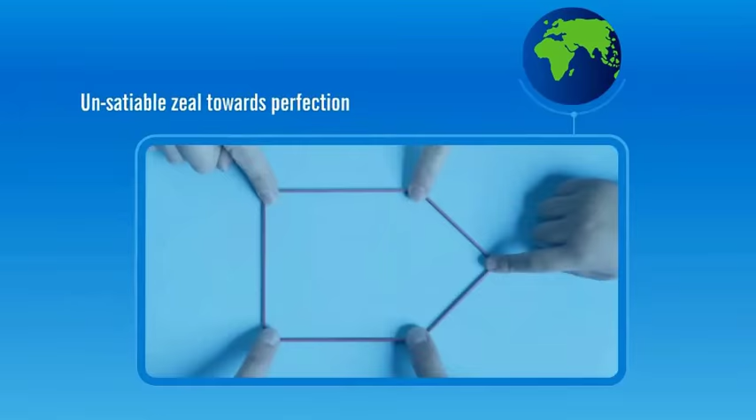An ongoing quest for advancement in technology. A never-ending saga of quality pursuit. An insatiable zeal towards perfection and a penchant for meeting commitments and client satisfaction. These principles hold the key to success of AFCONS and have catapulted us to new glitzy heights.

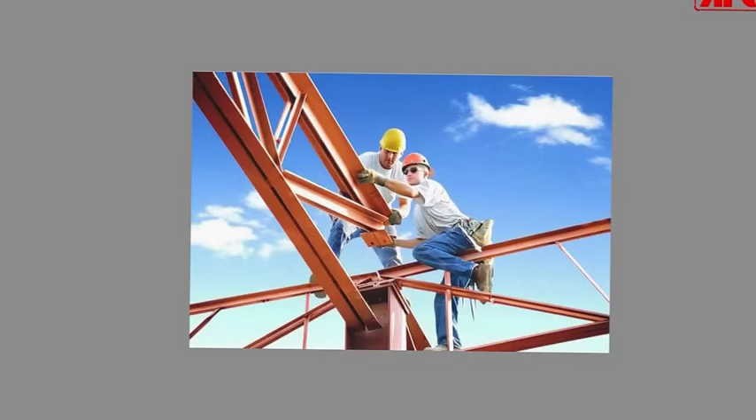Established in the year 1959, AFCONS today is one of India's premier construction companies, involved in the infrastructure development segment with an enviable record of executing varied types of construction projects in the fields of bridges, roads, marine works, pipelines, tunnels, LNG tanks, nuclear power projects, specialized foundations and superstructures.

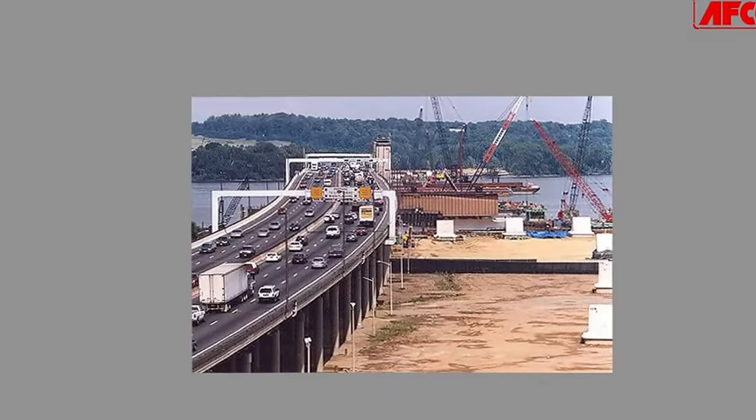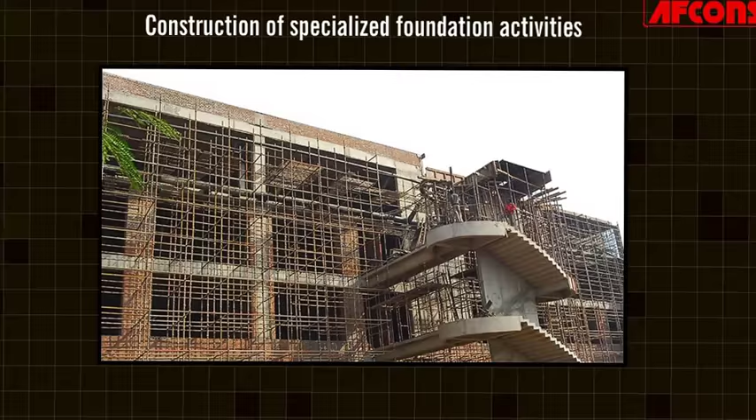In every phenomenon, the beginning is always the most important event. The success saga of AFCONS also goes back to the year 1959, when it was established as a partnership firm between Rodio Foundation Engineering Limited, Switzerland and Hazarat & Company, India. The company started its operations with construction of specialized foundation activities. Year 1963 saw the first major diversification landmark of the company as it entered the field of marine constructions.

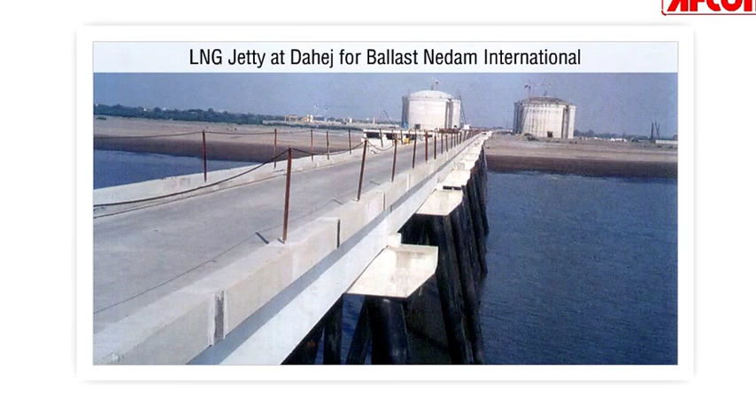The company completed 140 marine structures in the years to follow, including building dock complex at Vizag for Hindustan Shipyards, coal handling berth at Ennore for Chennai Port Trust, crude unloading jetty and associated facilities at Nagapattinam in Tamil Nadu for Chennai Petroleum Corporation, LNG jetty at Dahej for Ballast Nedam International, and marine oil terminal berth J1 and J2 at Mumbai for Mumbai Port Trust.

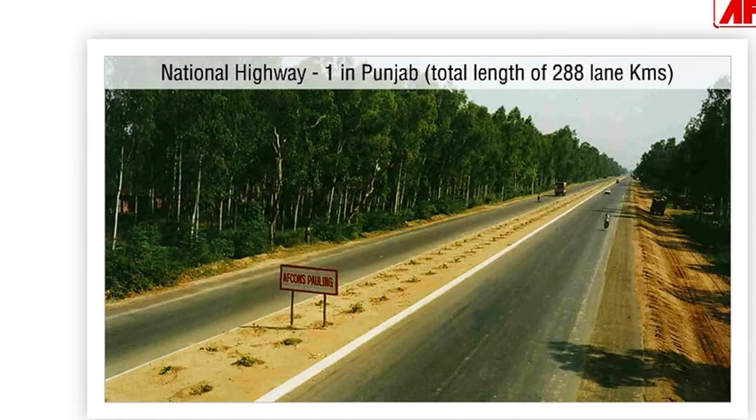In 1976, the company was registered as Asia Foundations and Constructions Limited, AFCONS. AFCONS entered road construction in the year 1986 and executed more than 600 kilometers of roadworks and expressway projects in India. National Highway 1 in Punjab, total length 288 lane kilometers. National Highway 45 in Tamil Nadu, total length of 160 lane kilometers.

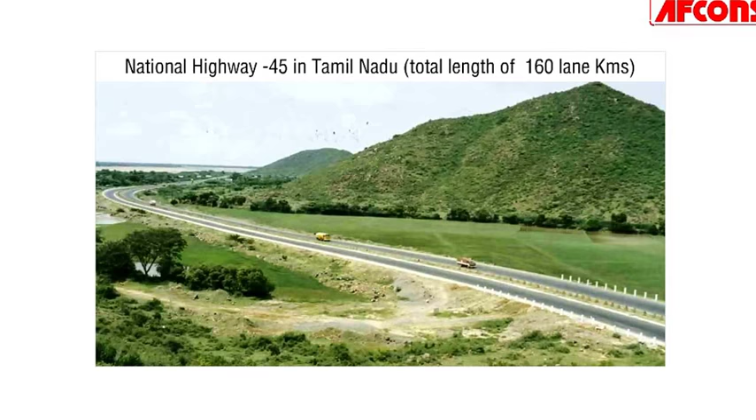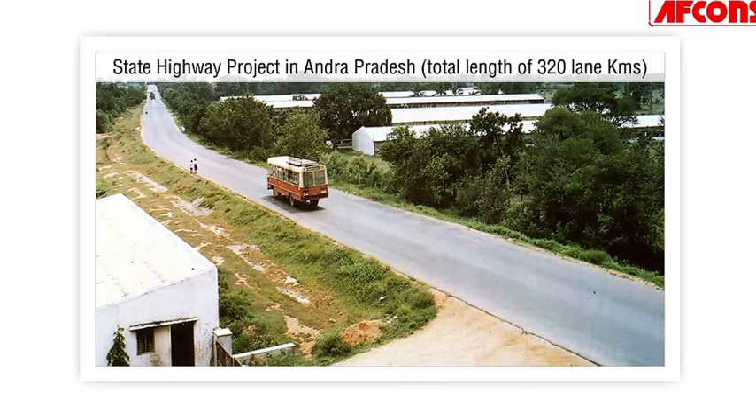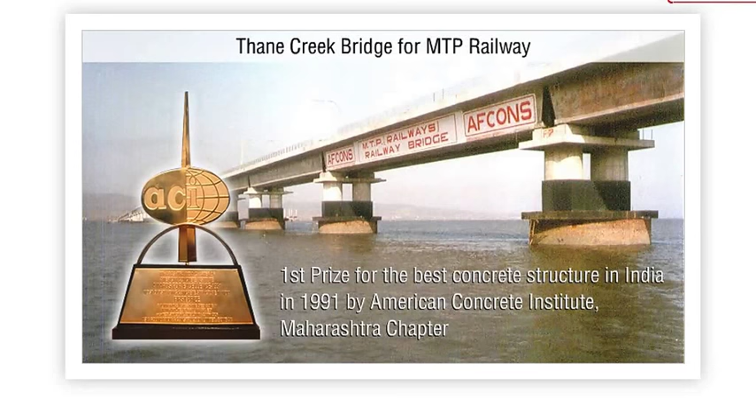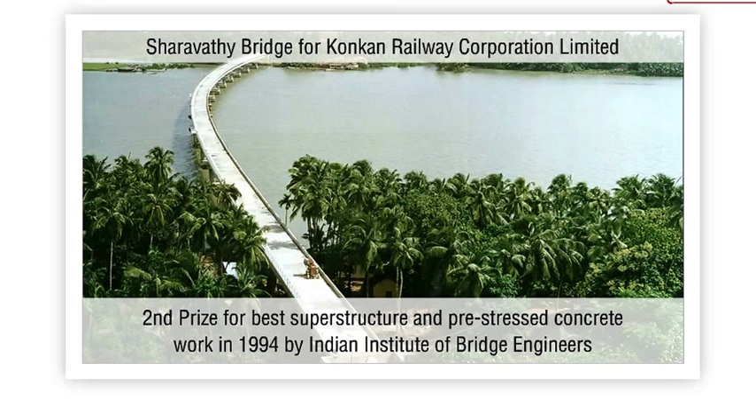Some of AFCONS' major strengths have been construction of road and railway bridges, flyovers, viaducts on pile foundations, well foundations and open foundations, and bridge superstructures comprising of pre-stressed concrete box girders. Some of the bridges and flyovers constructed by AFCONS have been awarded the most outstanding bridge structures, which include Thane Creek Bridge for MTP Railway, first prize for the best concrete structure in India in 1991 by American Concrete Institute, Maharashtra chapter. Sharavathy Bridge for Konkan Railway Corporation Limited, second prize for the best superstructure and pre-stressed concrete work in 1994 by Indian Institute of Bridge Engineers.

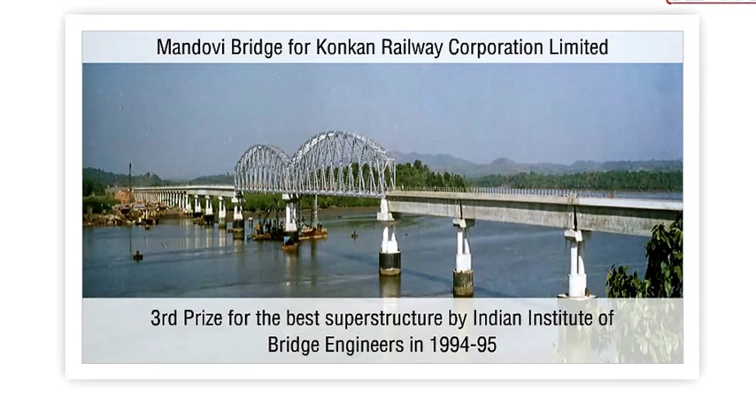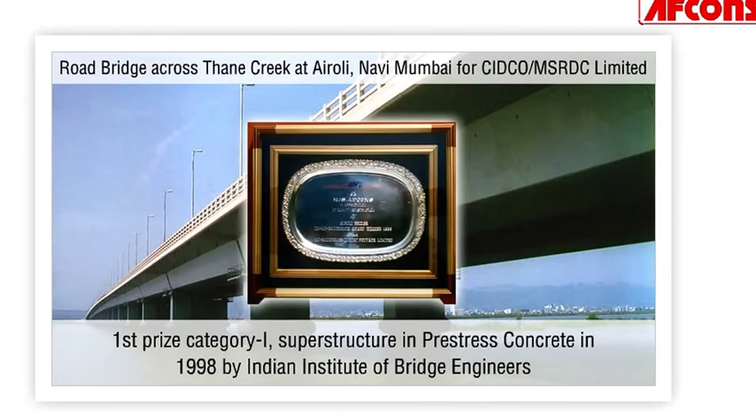Mandovi Bridge for Konkan Railway Corporation Limited, third prize for the best superstructure by Indian Institute of Bridge Engineers in 1994-95. Road bridge across Thane Creek at Airoli, Navi Mumbai for CIDCO MSRDC Limited, first prize Category 1, superstructure in pre-stressed concrete in 1998 by Indian Institute of Bridge Engineers. The year 1996 saw the company change its identity to AFCONS Infrastructure Limited due to its field of operations being closely related to infrastructure development.

From the year 2000, AFCONS is part of the $500 million Shapoorji Pallonji Group and is one of the market leaders in the construction industry. Besides doing major projects in India, AFCONS is also involved in various marine works in Sri Lanka, Mauritius and Yemen, railway bridges and marine facilities in Iraq, marine work in Assab and Ethiopia, and desalination plants in Oman. With a visionary management supported with able manpower and state-of-the-art equipment resources, the turnover of the company has seen a growth of over 100% over the last 5 years, from a mere 310 crores in the year 2000 to 700 crore rupees in 2005-2006.

AFCONS today employs more than 5,000 dedicated personnel, which include 1,000 engineering and management personnel, 1,500 technical and skilled operators, and over 2,000 people as project staff across its project locations. The success of AFCONS is evident by its most reputed clientele. The never-ending and growing list of the most reputed names in different industries relying on AFCONS reflects the fact that AFCONS have not just ruled the market, but have also won hearts and trust of our customers spread across the globe. To honor our time frames, delivery schedules, and quality parameters, we work with the best technology, systems, processes, and equipment that help us cut down on delivery cycle.

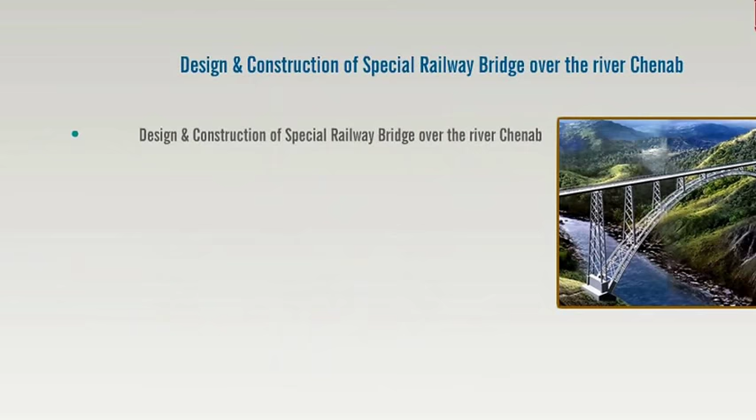In the year 2004, Afcons was awarded the contract for design and construction of special railway bridge over the river Chenab. Chenab Bridge is a steel arch bridge that spans the valley of the river Chenab near Jammu in northern India. As a part of Udhampur-Srinagar-Baramulla Rail Link project, this bridge will connect the Katra and Laole section of Jammu and Kashmir state. This major EPC contract, valued at 512 crore rupees, happens to be the single largest bridge contract awarded by the Indian Railways till date.

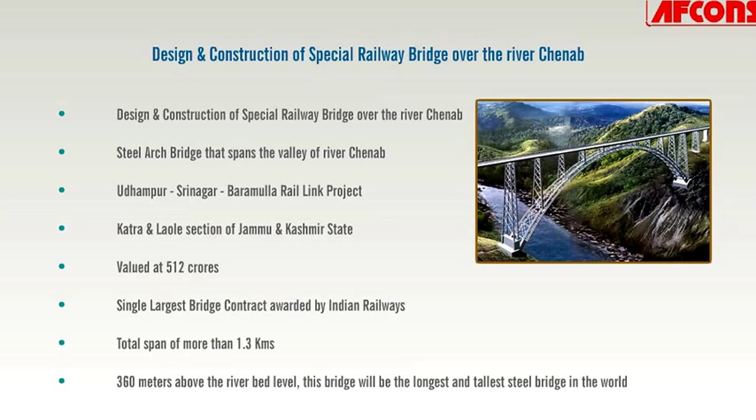With a total length of more than 1.3 kilometers, supported at 360 meters above the riverbed level, this bridge will be the highest steel bridge in the world. The contractor for this project is CBPU, that is Chenab Bridge Project Undertaking, which is an Afcons Ultra joint venture. Konkan Railway Corporation Limited, or KRCL, is the client for this project, whereas owner of the project is Indian Railways.

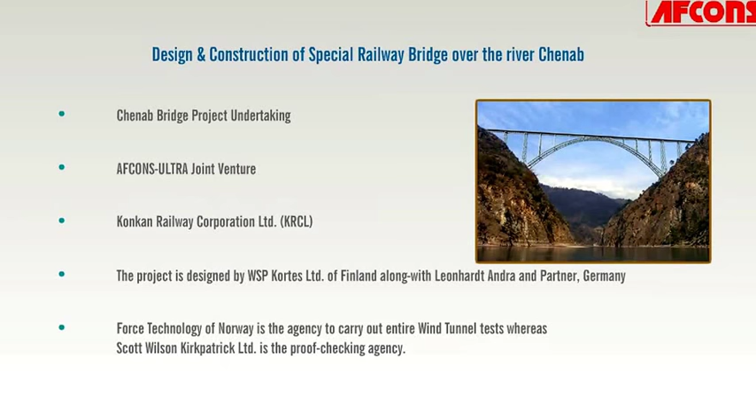The project is designed by WSP Kortes Limited of Finland, along with LAP Germany. Force Technology is the agency to carry out the entire wind tunnel tests in Denmark, whereas Scott Wilson Kirkpatrick Limited UK is the proof checking agency.

The Chenab Bridge alignment passes through a very rugged terrain of the Himalayan range and crosses the deep gorge of the river Chenab. The remote area location for the project without any road and communication facilities posed a real challenge for the construction process to start. The motorable road existed up to village Kanthan, which is 105 kilometers from Jammu, and one had to travel about 15 kilometers on foot from Kanthan to reach the bridge location. The two important villages on left and right abutment of the bridge are Bakkal and Kauri respectively, and are accessible by foot only. Therefore, constructing the railway bridge at this difficult terrain involved a significant engineering challenge.

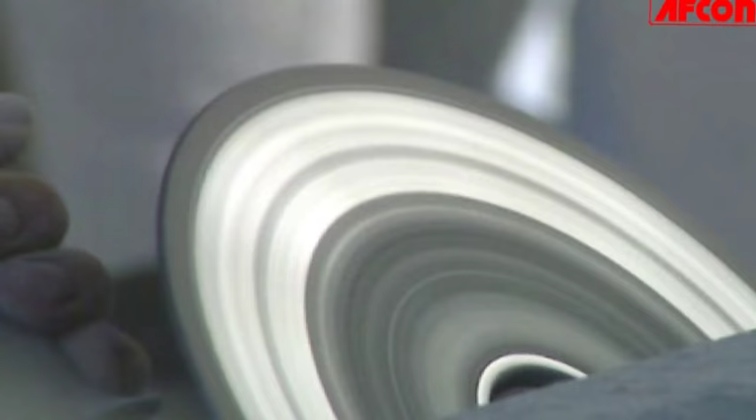To mobilize the construction equipment at the project site, an access road of about 14 kilometers was constructed up to Kauri from Kanthan, whereas access road to Bakkal village was made from Salal, which involved construction of a tunnel about 0.1 kilometers along with a road of about 10 kilometers. Due to topography of the area at the project location, grading of area had to be done to establish construction facilities. All temporary facilities are located at either end of the bridge.

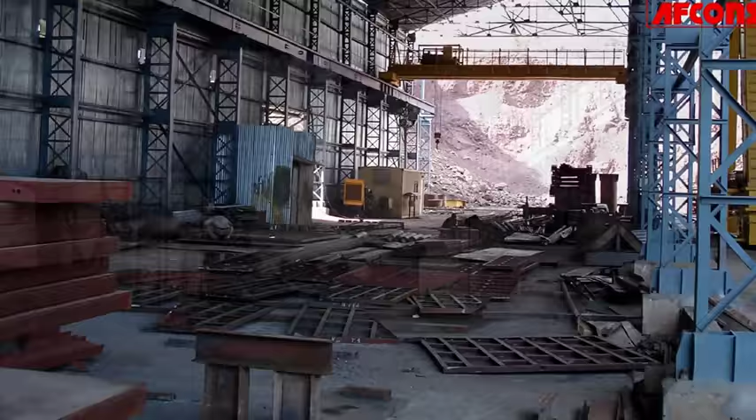About 50,000 square meters of land on Bakkal and Kauri end was acquired for establishing the site facilities such as fabrication yards, site office, colonies for staff and workmen, batching plants, material stacking, stores, etc. A private telephone exchange with satellite communication facilities is also installed at the bridge site.

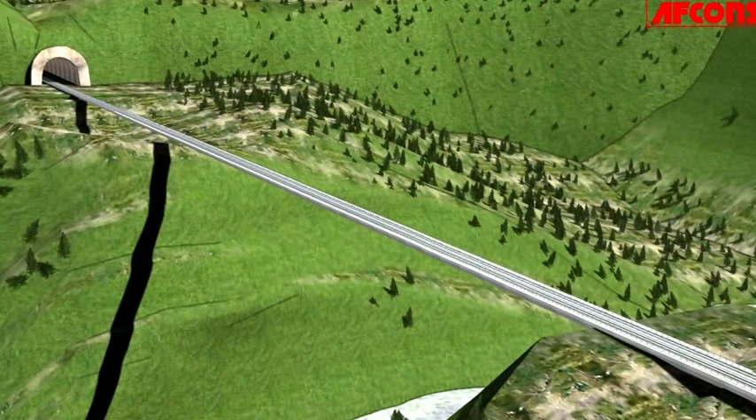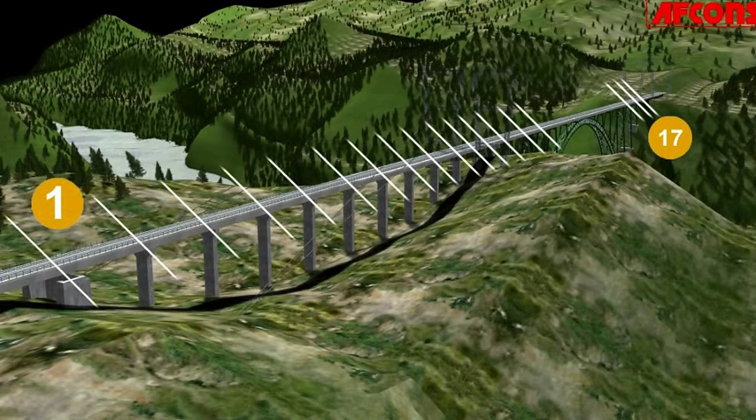The bridge would have the total length of 1.315 kilometers from abutment P10 at Bakkal end to P180 at Kauri end, having a total of 17 spans. The deck width would be 13.5 meters at the Kauri end and 17 meters at the arch portion till the Bakkal end. The construction of bridge mainly consists of three parts, consisting of approach span of 185 meters from location P10 to P40 from the Bakkal end, approach span of 650 meters from location P180 to P50 from the Kauri end, and the main steel arch span between location P40 and P50.

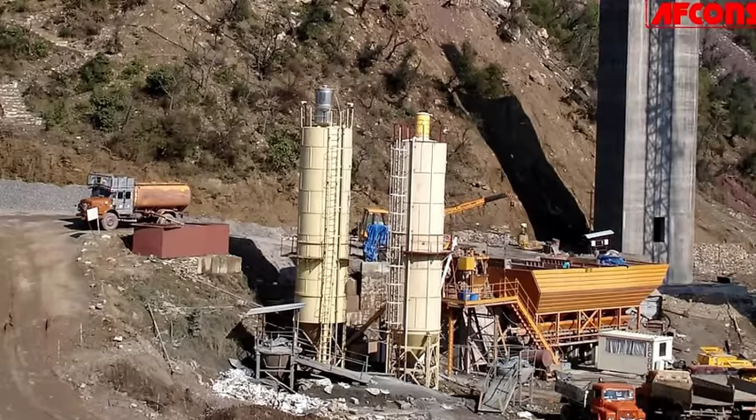The bridge would have a total of 18 foundations with 2 for arch, 2 for abutments, and 14 for the piers. A total of 46,000 cubic meters concrete quantity would be used, along with 3,600 metric tons of reinforcement steel and 25,000 metric tons of structural steel. Excavation of 11,80,000 cubic meters with 57,000 running meters of rock anchoring, drilling would be required to accomplish this specialized task.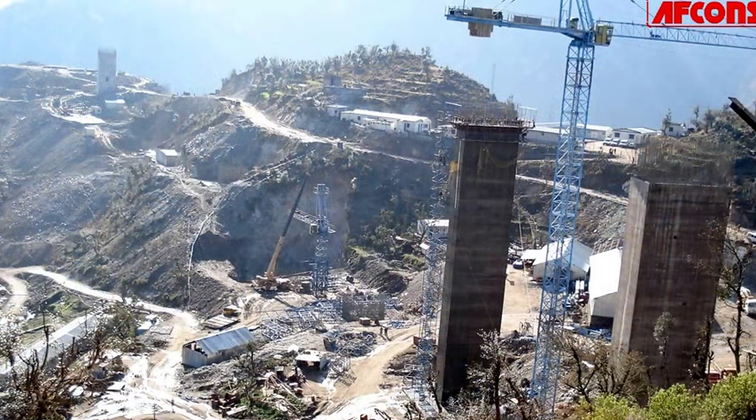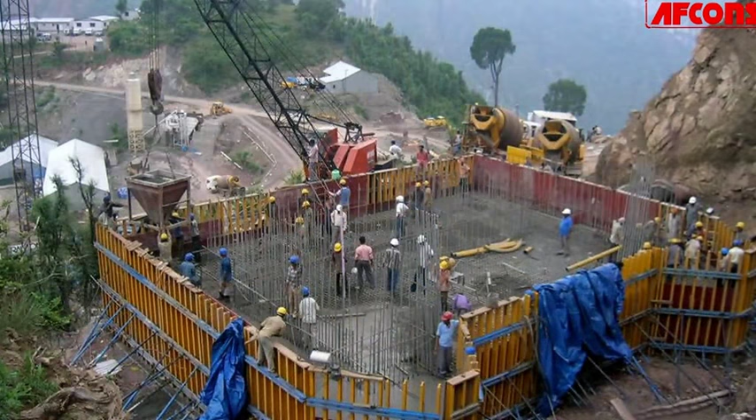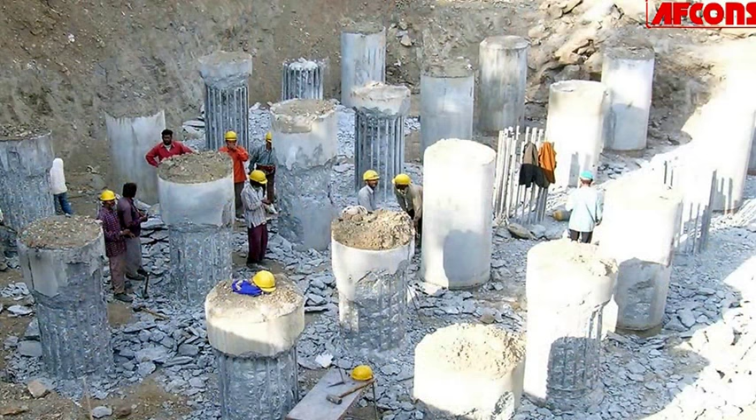The entire bridge segment is positioned from location P10 at Bakkal end to location P180 at the Kauri end. For the purpose of construction of the bridge, both open and pile foundations are being done. Piling work is carried out by conventional methods using tripod along with chisels and balers. Bored cast in situ piles of 1 meter diameter are being constructed at locations P150 to location P180. The total number of piles is 109 and the maximum depth of the pile is 35 meters at position P180.

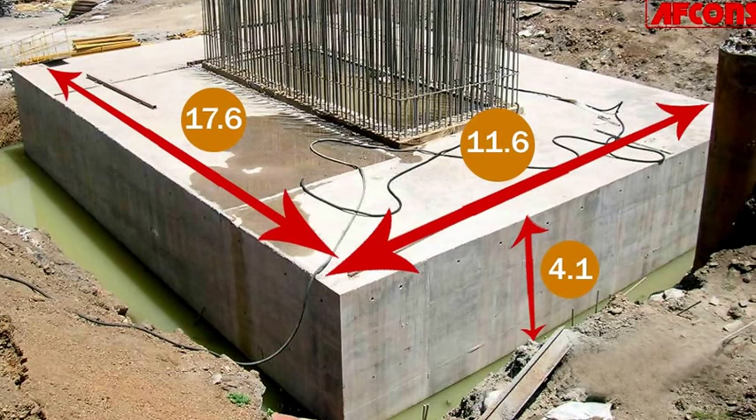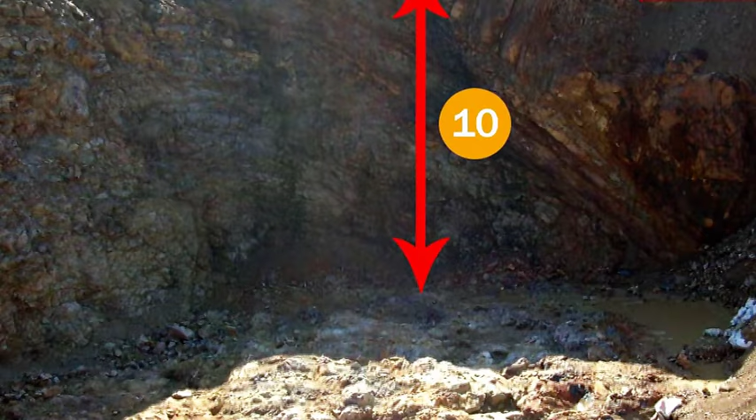Pile caps with a maximum size of 17.6 meters by 11.6 meters and a maximum depth of 4.1 meters are resting on the piles. 12 numbers open foundations for the piers and abutments are laid at 10 meters below original ground level with a depth of 3 meters at location P10 to P30 and locations P60 to P140. Maximum size of foundation would be 17.5 meters by 11.5 meters at location P80. The entire excavation is done using excavators and hard rock blasting.

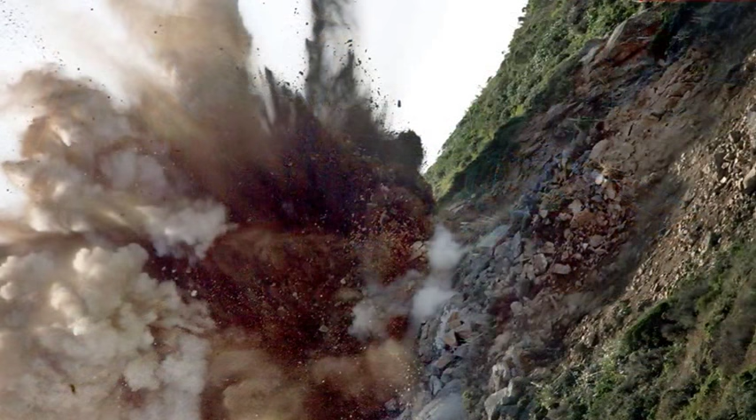Open foundations for the arch segments would be constructed at locations P40 and P50, with a size of 38 by 28 meters, having a height of 22 meters. L&T Doka shuttering is being used at both these locations.

A total of 2 concrete abutments, 5 steel piers and 11 concrete piers are constructed to carry the bridge, besides 9 trestles to support the main arch segment.

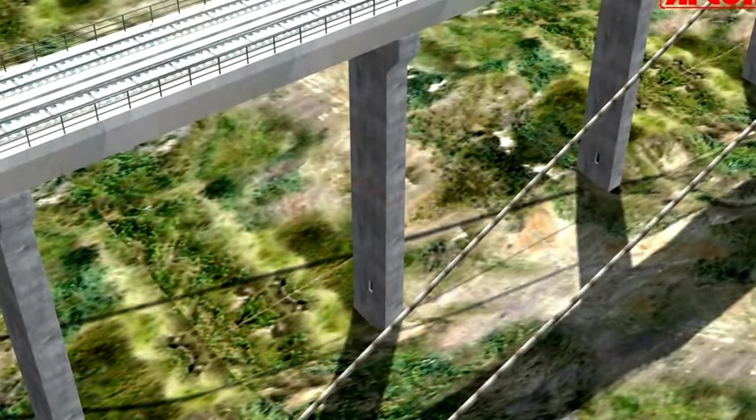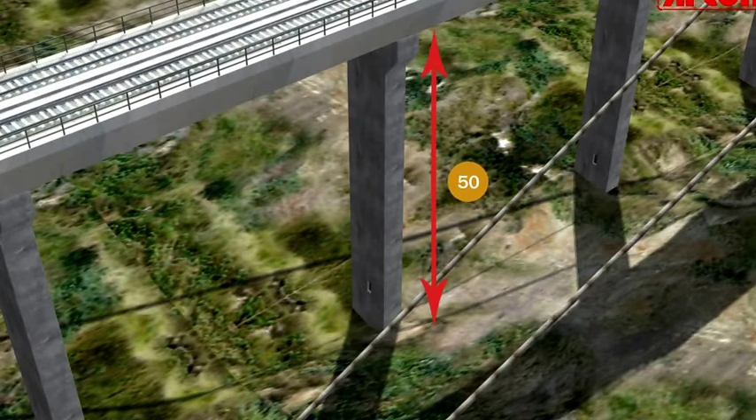The maximum height of the concrete pier would be 50 meters at location P140. Slip-form type shuttering is used to build up all the concrete piers from the Kauri end of the bridge.

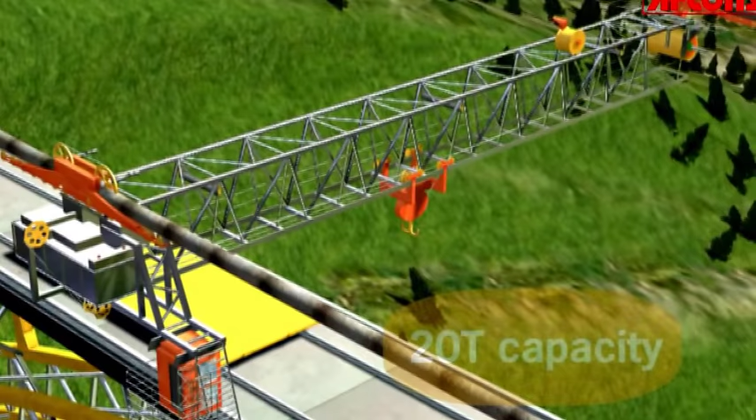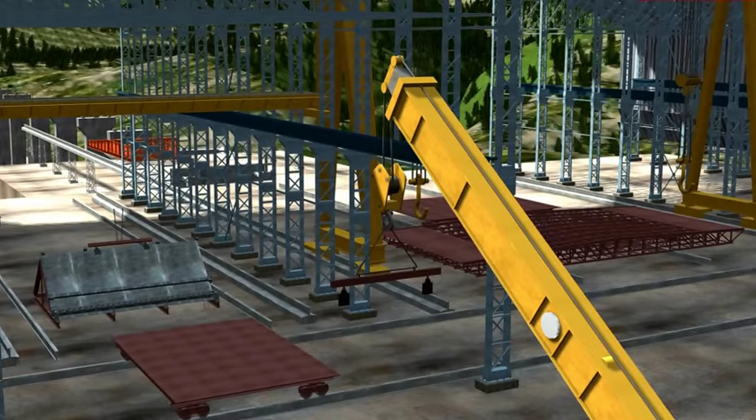2 cable cranes of capacity 20 tons each will be used to transport the steel pier components to their respective locations. Fabrication of 3 steel piers is done at Bakkal end, whereas the balance is done at Kauri end yards. There are 4 fabrication yards at the construction site, with 2 yards at each respective end of the bridge.

Yard 1 is just behind location P180 on the Kauri end and is meant for fabrication of deck segments P180 to P45. The sub-assembly shop is used for plate cutting and edge preparation, welding and non-destructive testing, from where it is transferred to the main assembly shop where segments are assembled and welded.

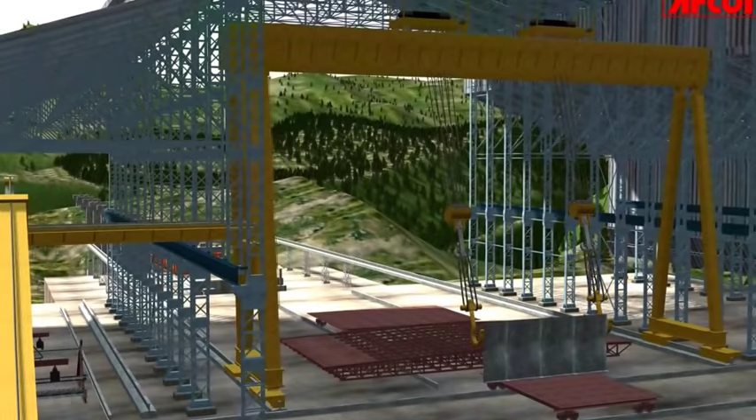The launching yard takes care of connecting the deck elements by welding, quality control and final launch of the segment after painting and metallizing. Quantity of steel work to be done in this yard is about 7,570 metric tons.

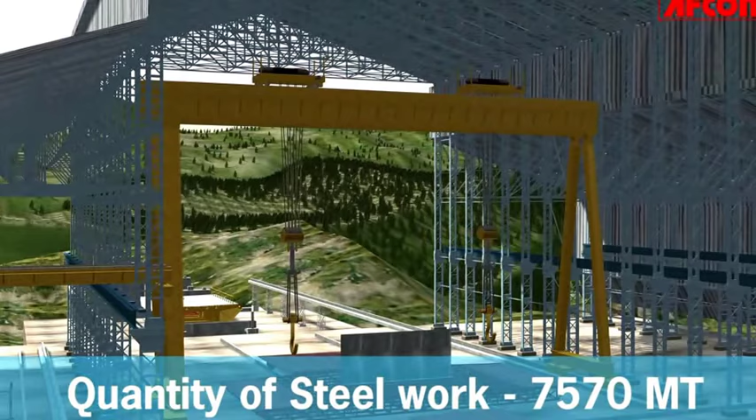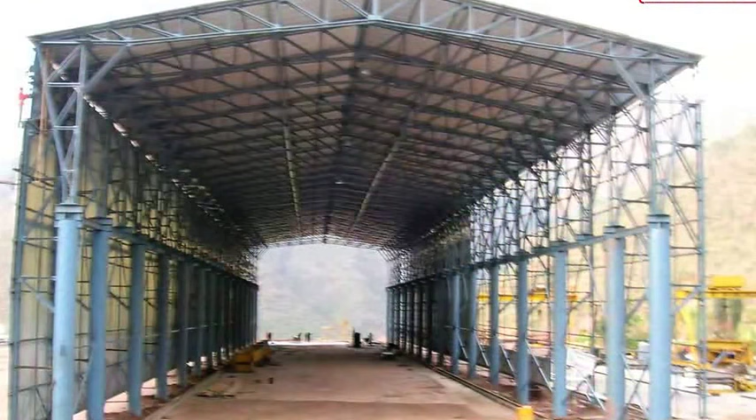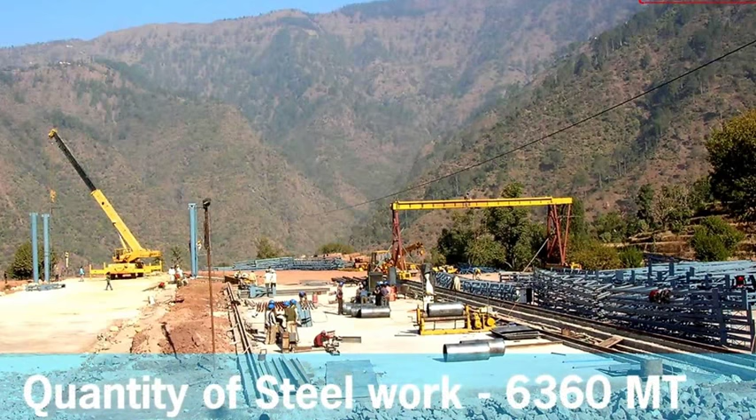Yard 2 is at Surandi, located at a distance of 6 kilometers from the location P180 on the Kauri end. This yard is meant for fabrication of arch segments P50 to P45 and steel piers from P60 to P50. Quantity of steel work to be done in this yard is about 6,360 metric tons.

Yard 3, located on Bakkal end, is meant for fabrication of deck segments P10 to P45. Quantity of steel work to be done in this yard is about 3,570 metric tons.

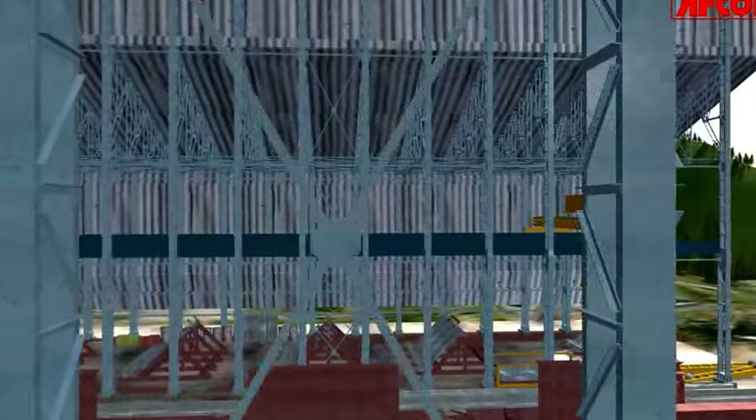Yard 4 at the Bakkal end is meant for fabrication of steel piers P20 to P40 and arch and trestle segments from location P40 to P45. Quantity of fabrication to be carried out in this yard is about 7,130 metric tons.

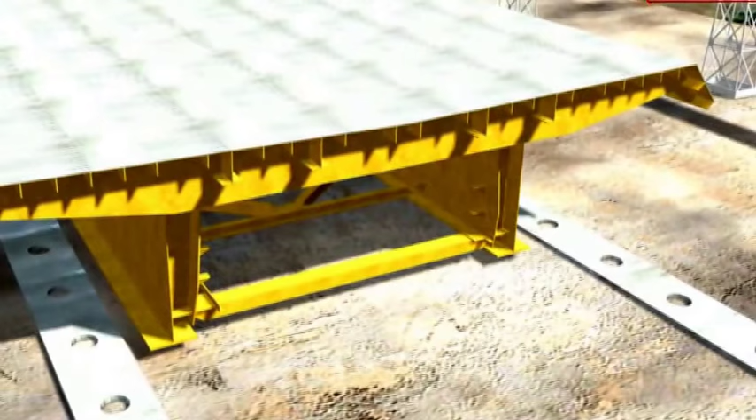The deck segment consists of 2 main girders, 2 cross girders and 6 secondary beams, which are assembled as T-members with web and bottom flanges.

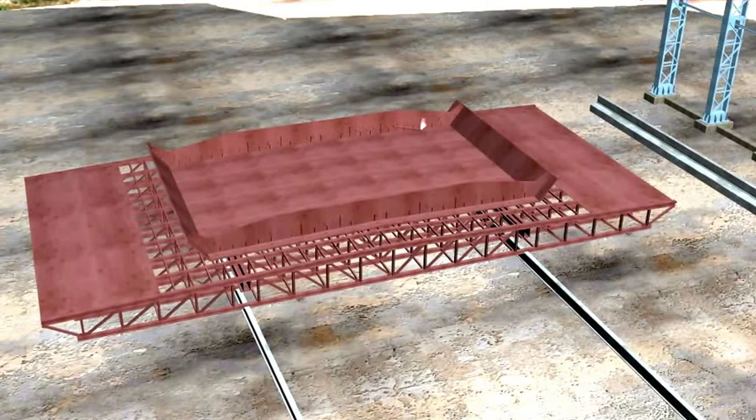The first step is to assemble 2 numbers of main girders. Web plates are assembled on a platform. Joints are welded with submerged arc welding machines. This web assembly is shifted to the fixture for connecting bottom flange plate. The main girder is then welded together by submerged arc welding.

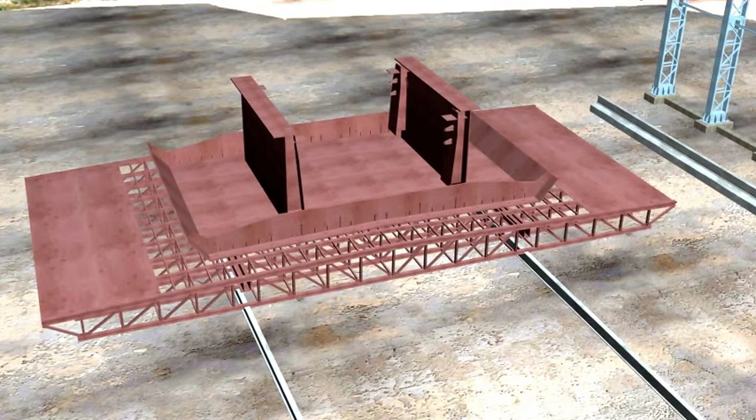Thereafter, 2 cross beams and 6 secondary beams are assembled. Cross beams are assembled as T-beams. Steel plates for the deck are then laid and assembled on a platform trolley in inverted arrangement for ease of assembly, and as it is most suitable for submerged arc welding.

2 cross girders and 2 main girders are then fixed with deck stiffeners to the deck plate. Lateral trusses are provided to complete the segment assembly.

After completing all welding in this position, the segment is then turned upside down with the help of a 100-ton Goliath crane. After completing welding in this position and inspection and weld testing, the segment is shifted to the launching yard for connecting the segments by welding, sandblasting, painting and metallizing, and launching.

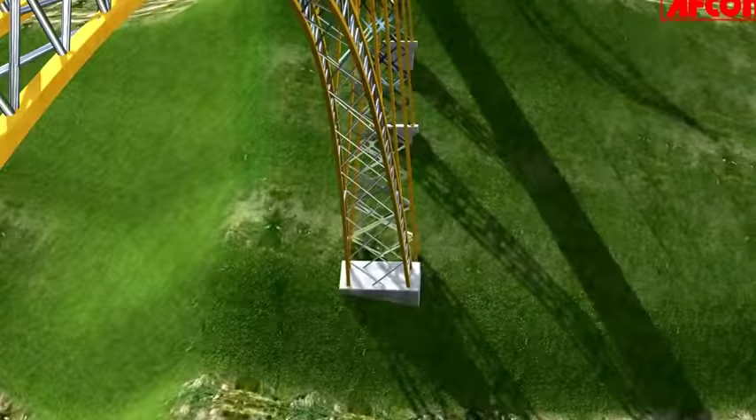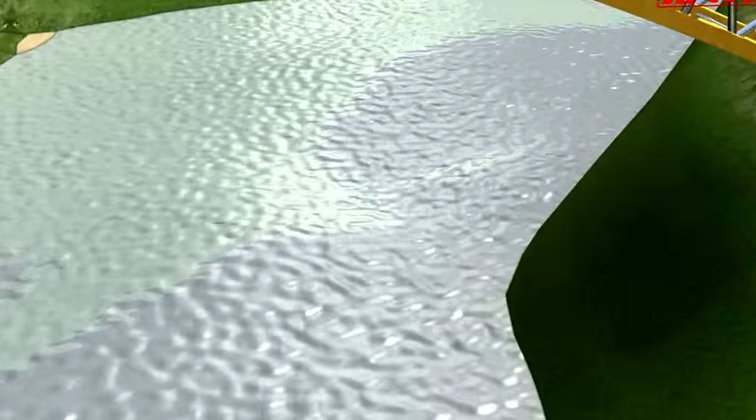The main arch consists of various segments bolted together. The arch is tapered towards the middle for providing lateral stiffness. Each arch segment consists of a main chord which has box sections with infill concrete, and its rectangular section allows for bolted joints connected by stiffened plates.

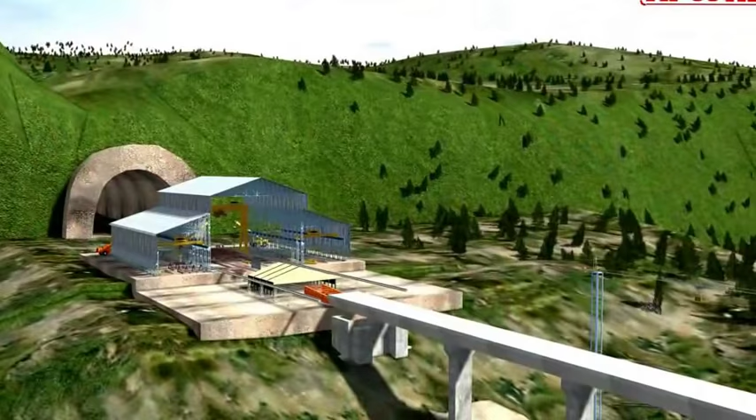Incremental launching method is being used for erection of deck segments on the main approach span from both Bakkal and Kauri ends. For this purpose, launching yards are established at each end respectively. Incremental launching from the Kauri end approach is done in 3 stages owing to the 300 meter curved alignment of the bridge.

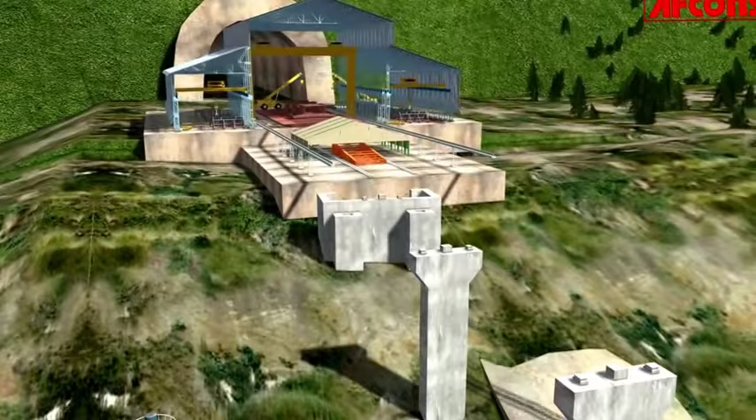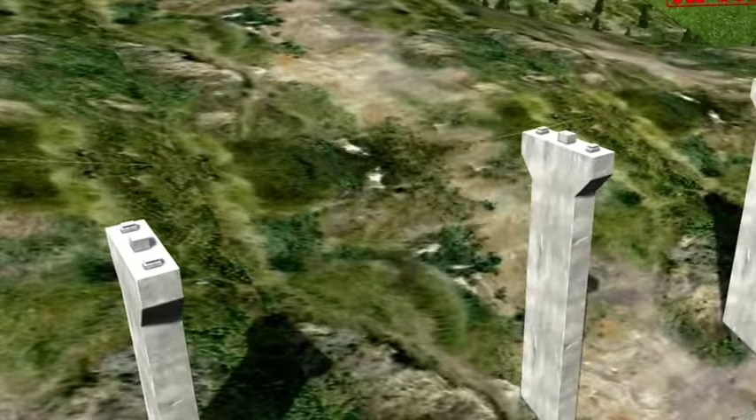Stage 1 of incremental launching is from location P180 to P130. Stage 2 launching is from location P80 to P130, and Stage 3 launching is from location P70 to P50. The balance portion between P80 and P70 is done in situ.

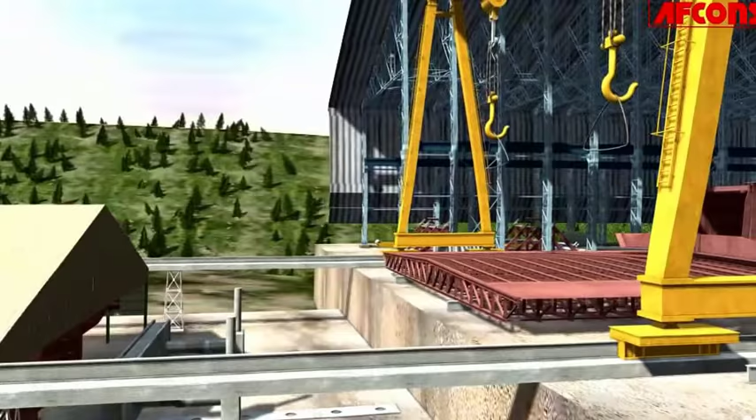On the Bakkal end, incremental launching is done in a single stage from P10 to P40. A launching yard with the launching equipment is established behind the abutment locations P10 and P180 at the Bakkal and Kauri ends respectively.

Prefabricated deck segments are transported to the launching pad on either side. 3 deck segments are connected together by welding, and a steel launching nose of 27 and 36 meters length respectively is attached in front of the first deck segment. This launching nose guides the deck during launching and also reduces the moments in the deck during launching operation, thereby avoiding any kind of damage to the piers and the deck segments.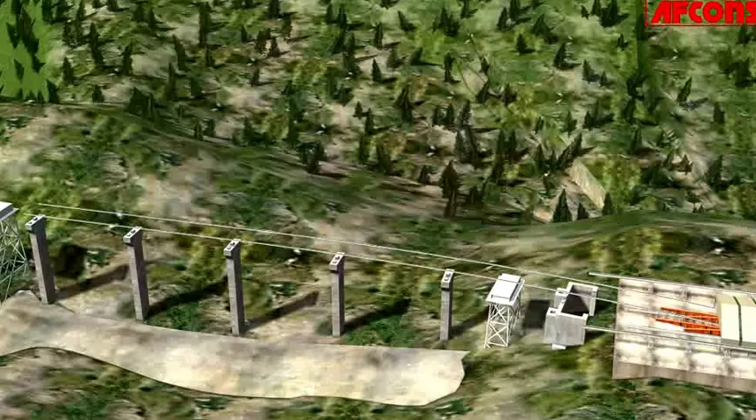Side guidances are provided for proper alignment of the deck during the launching on this curved portion. A temporary pier is erected between P170 and P180 for load balancing. Pushing the 3 welded segments with launching nose using 2 hydraulic jacks will launch the deck to the extent of a length of 1 segment, that is 25 meters.

Before the next launching, another 3 deck segments will be connected and launching would be repeated for another 25 meters. This procedure would be repeated till the deck is launched and placed in correct positions from P180 to P130.

A temporary pier is erected between positions P120 and P130. Once the first deck segment reaches this temporary pier, the launching nose is removed using a derrick. Prefabricated deck segments are transported up to location P130 from the Kauri end on a trolley on the bridge deck and lowered using a derrick, and thereafter taken to the launching pad by a 100-ton capacity trailer and lifted with the help of the 100-ton Goliath crane.

For stage 2 of launching, a launching yard including a 100-ton Goliath crane is established between P70 and P80. A temporary pier is constructed between locations P80 and P90 for load balancing. The process of incremental launching is carried out from the platform at P80. The launching nose is dismantled using a derrick as the deck segment reaches the location between P130 and P120.

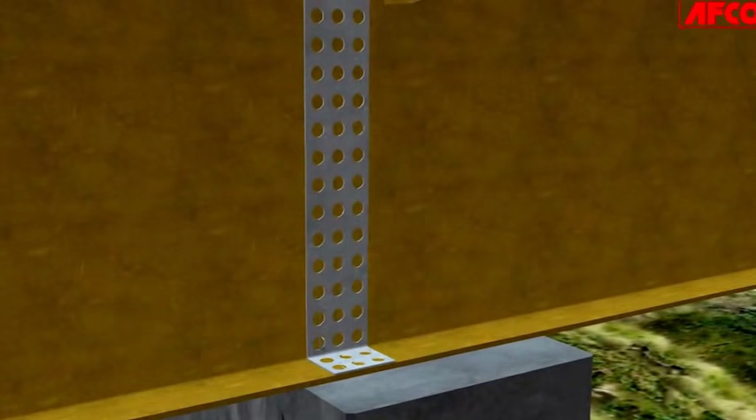Middle segments are joined by bolting, completing stage 2 of incremental launching from the Kauri end. Stage 3 of incremental launching from P70 to P50 uses the launching yard between P70 and P80.

Segments are shifted to the launching yard by the trolley on the deck. It is lowered down onto the platform using the 100-ton Goliath crane. A temporary pier is constructed between locations P70 and P60 to carry out the incremental launching process up to location P50. The balance span between P80 and P70 is erected on the platform itself.

The approach from the Bakkal end being straight, the incremental launching is carried out in a single stage between P10 and P40, following the same process.

Two cable cranes with a capacity of 20 tons each and two derrick cranes with a capacity of 100 tons each are used to complete the main arch segment of the bridge between locations P40 and P50. For load balancing, the work of lifting and placing the arch segments followed by deck segments is done from both P40 and P50 ends alternately.

A derrick is placed in position P40 and the first two arch segments are lowered and placed in position.